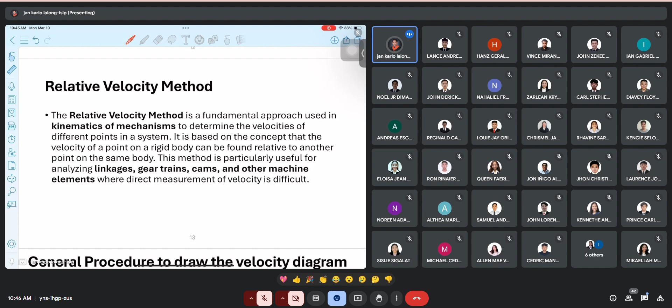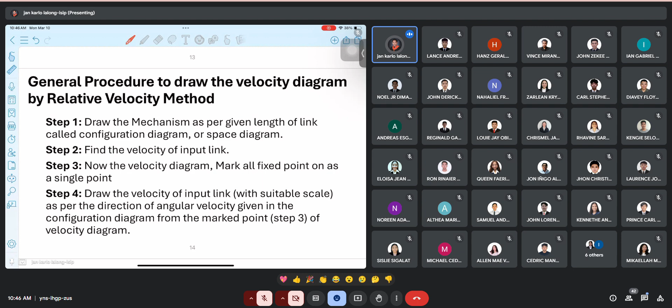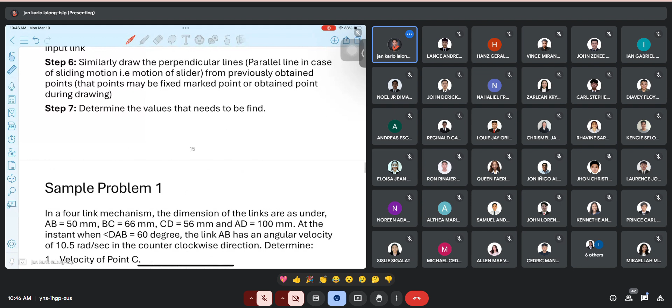Okay, so I have listed here 7 steps on how we are going to draw the velocity diagram, so that once we have the velocity diagram, we can be able to solve our velocity. So I will not discuss each one individually. Let's proceed to our sample problem so that we can easily visualize and understand the procedures on how we can solve our velocity.

Okay, so let's proceed to our sample problem number 1. We have a 4-link mechanism, a 4-bar linkage again as our first example. In a 4-link mechanism, the dimensions of the links are as under: AB is 50 mm, BC is 66 mm, CD is 56 mm, and AD is 100 mm. So at the instant,

at the instant when angle DAB is 60 degrees, the link AB has an angular velocity of 10.5 rad per second in the counterclockwise direction. So we are going to find the velocity at point C and the angular velocities of the links BC and CD. Okay, so as our first step,

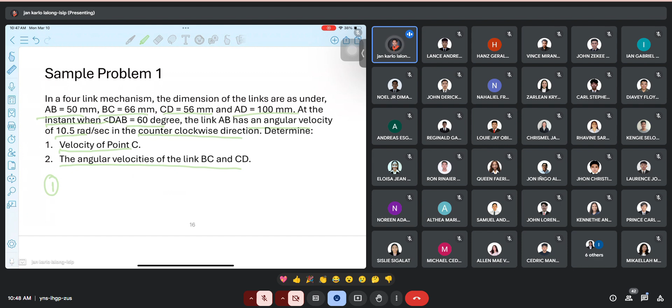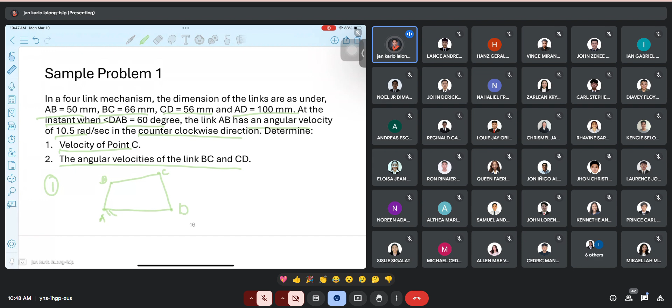we are going to illustrate or graph our given mechanism. I didn't include the illustration here, but our given is a 4-bar mechanism wherein these are points A, B, C, and D. And then we have our fixed link AD.

Okay, so the first thing we're going to do is graph our mechanism. In the past, whenever I asked you to get our graph, you would solve the transmission angle or the output angle and then get the graph from it. But I know it can also be done since all our sides, all our links, are given. So we can do it via graphical method.

Okay, so for this time, let's do it purely by graphical method in getting our sample problem. If you have your paper, compass, protractor, and ruler with you, we can get the graph. So wait, let me present my screen first.

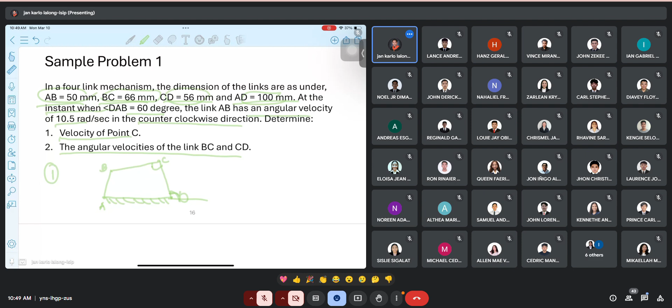Okay, so nakikita na ba yung ating AutoCAD? Yes po, opo sir. Okay, so let's proceed dun sa ating pag-graph ng ating given.

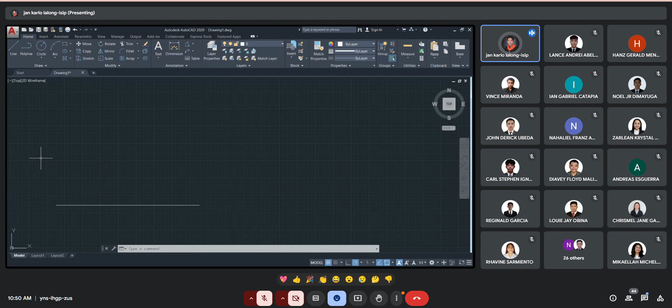Okay, so based on our given, we have our fixed link AD to be 100 mm. So we have this 100 mm. This is point A and this is point D.

And then given tayo ng AB, which is, sabi sa given natin, is 60 degrees from the horizontal. So measure tayo ng 60 degrees dito. And then AB is 50 mm.

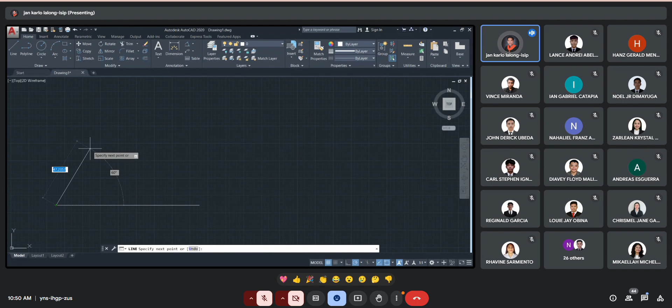Okay, so using your compass, pwede naman natin makuha yung ating BC at saka CD. So paano? You are going to draw a curve wherein ang kanyang radius, ang BC natin is 66, so this is 66. And then from this point, ang ating link CD is 56 mm, so we're going to draw a circle with a radius of 56 mm.

And then kung makikita natin, we have the intersection dito sa part na to. So you are going to draw a line here. Kung makikita natin, that is 66 mm, which is also our given naman. So tama naman, and this is 56 mm.

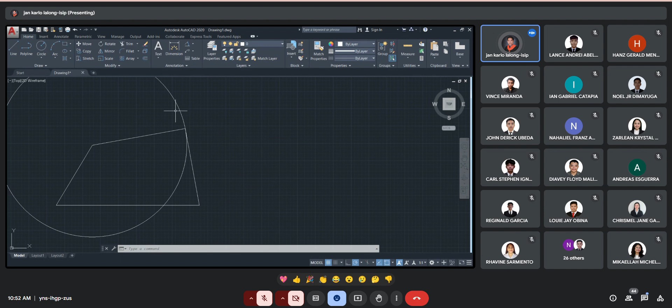Okay, and then we can now remove yung ating mga guidelines na ginawa. Okay, so everyone, do you follow? Nag-graph naman yung ating given four-link mechanism. So having the correct graph will be critical dito sa ating pagsosolve.

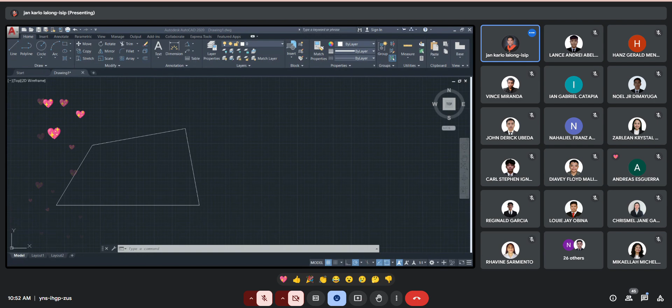Okay, so go back muna tayo dito sa aking presentation. So dito lang, wala kasi akong compass dito sa notes. Bali, protractor na lang at saka ruler ang kaya kong gamitan.

Okay, so again let's have the graph dito. So ang unang sabi dyan, 100, so that is 10. Okay, so 10, tapos naka 60 degrees daw. And then anong sukat niya? We have 50 mm dito.

Tapos, anong angle to from the horizontal? So then, kayo naman, you can use compass naman dito. Okay, wait lang, minatawag lang.

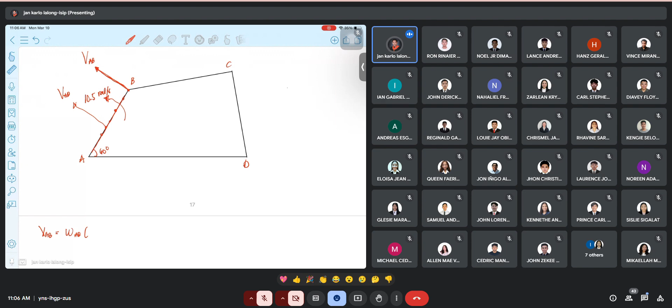Okay, so our next step, we are going to solve for our velocity at AB. So again, ang ating formula para ma-solve natin yung velocity, we have the angular velocity at AB times our radius. So at this example, yung ating radius na gagamitan is AB. Okay, so what will be the measurement, binigay na yung ating angular velocity in rad per second.

So madali na, hindi na natin siya i-convert. And then ang measurement natin ng AB is 50 mm. Again, in solving the velocity, ang gamitin natin laging unit is meter per second, so i-convert natin yung mm to meters. Okay, so what will be the value of our velocity AB? Paki-calculate ako and then paki-chat dito sa chat box.

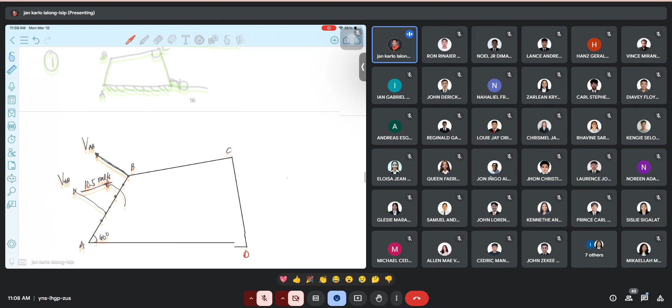Okay, so we have 0.525 meter per second. Kapag mag-solve tayo ng mga velocity problem, ang given sa atin is what is the velocity at our input link or yung ating pinaka-crank. That will be our first na kukunin. And then after that, we are going to establish yung ating gagamitin na scale.

Okay, so we are going to establish yung ating scale. So with regards to our scale, kayo naman ang bahala ng mag-scale niyan. Saan ba kayo convenient? Saka ano yung sa tingin nyo na tama with the measurement na given sa atin.

Okay, so dito, I will just have the scale. For example, our 0.525 meter per second is equals to 50 mm. So now, kapag ito yung ginamit kong scale, kukunin natin kung anong scale niya kapag meter per seconds to length. So if I have 1 meter per seconds, what will be the value of length?

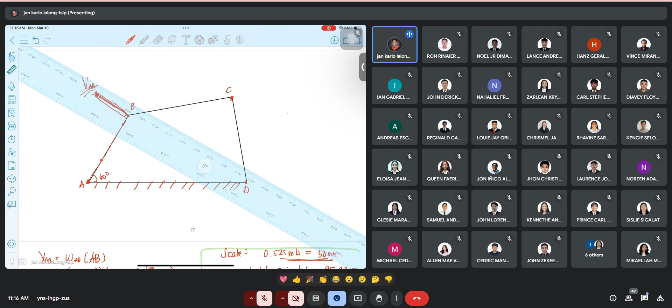Okay, now we have our point C naman. Kung papansin nyo dito sa ating graph, we have point C na connected sa ating point B. And then, our point D which is connected dito sa ating point C din. Again, we are going to get yung perpendicular line dito. And then kukunin natin yung intersection sa ating graph. So let's connect first our point B going to our point C. So somewhere here, pero hindi pa natin sure kung saan. Kukunin natin yung distance, yung intersection nung line na ito at nung line na ito, and that point will be our point C. So paano ba yon?

Again, we are going to use our rulers. And then i-measure natin yung kanyang perpendicular line dito. So itatama ulit natin yung ruler natin dito so that it will be perpendicular. Ayan. So kung tama na yung ruler natin, let's go back here and then let's draw a line, the same line yung ating ito-drawing. Okay, so this first, this is a guideline muna.

And then, balik tayo sa ating pinaka-graph na ginawa. I-measure naman natin yung ating perpendicular line sa link CD. So itatapat ulit natin siya dito. So 10 degrees daw, sabi dito sa ruler ko. And then we are going to draw a line from point D, that is point D to our point C. And then this will be our intersection. So this line will be our point C.

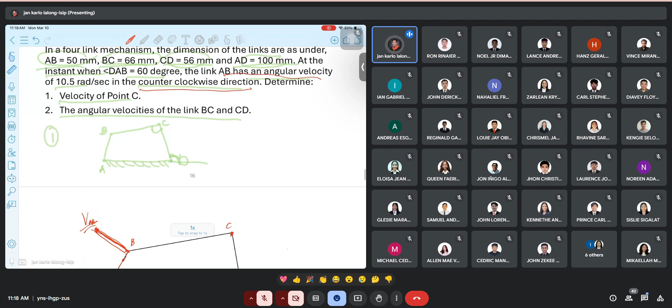Okay, so let's go back sa ating unknowns. So sabi dito, we're going to find the velocity at point C. So unahin natin yon. We have the velocity at point C.

So going back sa ating graph, this is our point C, and then it should be perpendicular dito, di ba? But then, our velocity at point C is equals to our velocity at the link CD, kasi any point dito sa ating link CD is equals.

Kaya yung ating point C ay equal sa velocity natin in any point dito sa ating VCD. So let's have our velocity at C is equals to VCD, velocity at CD natin. At para ma-measure natin yon, we're going to sukatin natin itong ating velocity CD by graphical method.

So using our ruler dito, tapat muna natin. Okay, so yung length ng ating VCD is around 39 mm, 3.9 centimeter. So that is 39 mm.

Okay, so ngayon, we're going back sa ating scale. So sabi natin, 1 mm is 0.0105 meter per second. So we are going to convert yung ating mm to meter per second. So we have 0.0105 meter per second per 1 millimeter. Okay, cancel ang millimeter. So our velocity at point C will be, so paki-compute, what will be our velocity at point C?

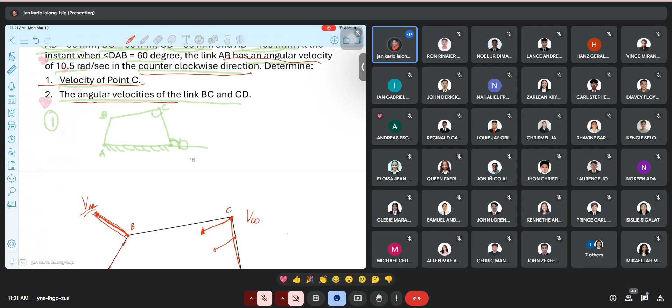Okay, so let's proceed sa next. We have our velocity and angular velocities of the link BC and CD. We have BC and CD.

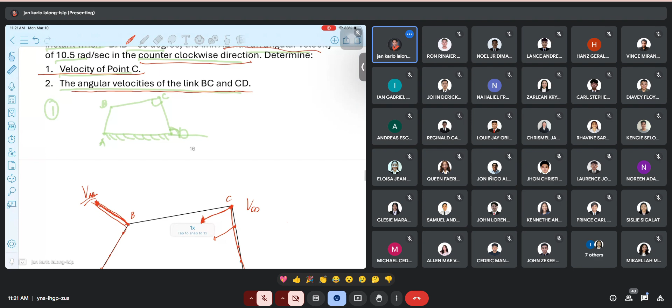Okay, so going back, we have our velocity to be equals to our angular velocity times the radius. So our angular velocity will be solved using our velocity over our radius. So let's have our angular velocity at BC, it will be equal to the velocity of BC over yung R natin, radius. So in the case of BC, that will be the length of our link BC.

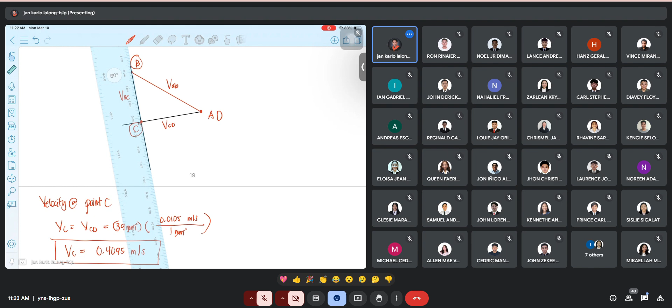Okay, so now we are going to measure yung ating velocity at BC. So kunin ulit natin yung inyong ruler and then sukatin nyo kung ano yung length natin dito ng point BC. Okay, so base sa ruler ko dito, that is at... asan na yun? 3.4. Okay, so depends naman kung ano yung makukuha nyo dyan. Okay, so in my illustration, in my graph, nakuha ko is 3.4 centimeters, so that is 34 mm.

Again, our scale na establish natin, 0.0105 meter per second is 1 mm. Okay, and then what is the length of our BC? What is the length of our link BC? So our BC is 66 mm. So we have here 66 mm. And then sabi ko nga dito may meters tayo, so dapat naka-meter siya. So 1 meter is 1,000 mm.

Okay, so with that, what will be the value of our angular velocity BC? Okay, so we have 5.409 radians per second. Okay, so that is already our angular velocity at BC.

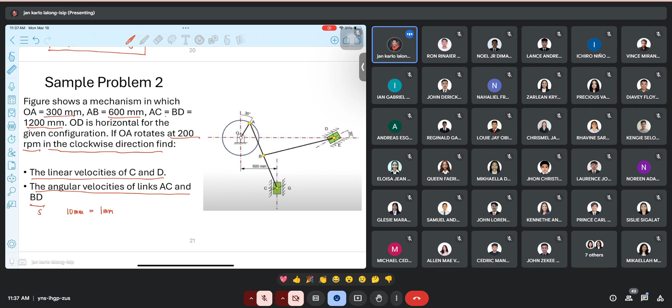So this is our scale value. So 300 becomes 30, this becomes 60, this becomes 120. Okay, so let's have our graph here.

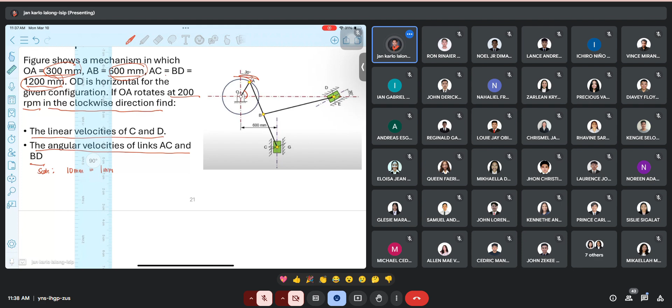Okay, let's use a ruler. First, we have our fixed point at O, and that is at 30 degrees with the vertical. So with the horizontal, that is 60 degrees. Let's make it 60 degrees.

So let's start drawing our mechanism. At 30 degrees with the vertical, that is 300 mm, so that is 3 centimeters or 30 millimeters on our scale. So at this point, this is 3.

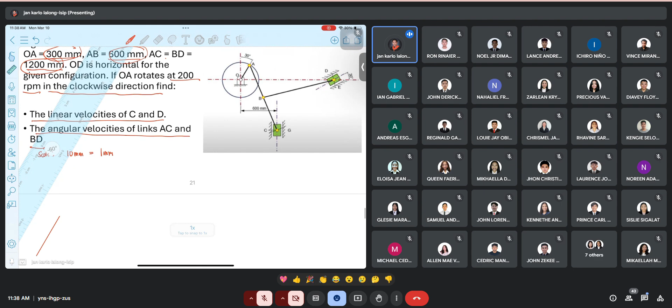Now the distance from point O to our point C is 600 mm. So let's first make a horizontal line here as a guideline for our reference.

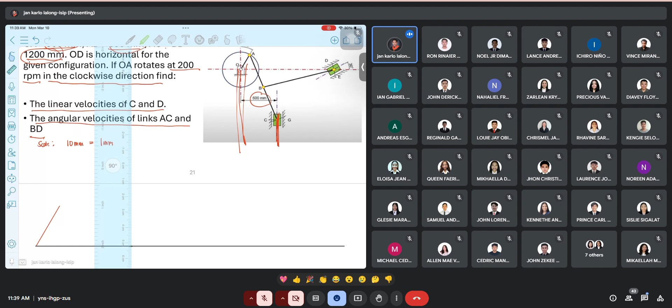And then at 600 mm, that is 6 centimeters or 60 mm. So let's highlight that, and then draw our line here. Let's put a line first.

And then our AC is 1200 mm, so that is 120 millimeters. From that point, we measure 12 cm, wherein they will intersect at our vertical line here. So 12 is the right measurement, there, 12.

Okay, so we are going to draw a line here. So now we can erase the guideline we made.

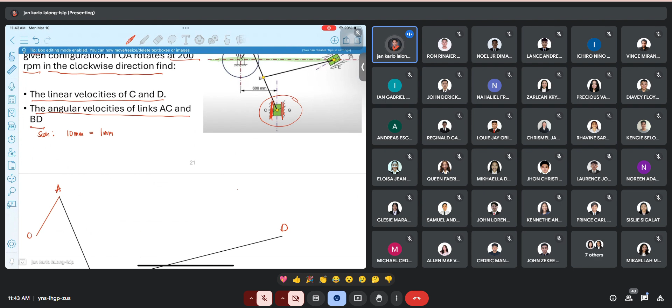Okay, so this is our point O, and this is A, B, C, and D. But if we notice, we also have point G, which is our ground for this slider. And we have our point E here.

Now we are going to have our velocity diagram. Okay, so how are we going to start solving our velocity diagram? First, let's have our scale.

So before we have our scale, let's solve for our velocity at the input. At this point, we get the velocity of AO, the velocity at link AO. Our velocity at AO will be equal to the angular velocity at AO times the radius, and the radius we use is also AO. So first we solve for our angular velocity at AO.

So again, that is 2 pi n. It will become 2 pi times the given speed in the problem, which is 200 RPM, that is 200 revolutions per minute. And since meters per second is our unit, we convert it into seconds, so 1 minute is 60 seconds.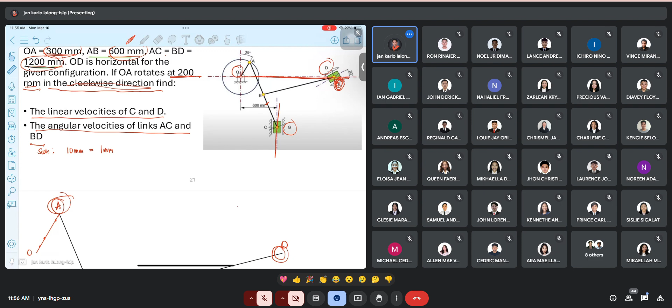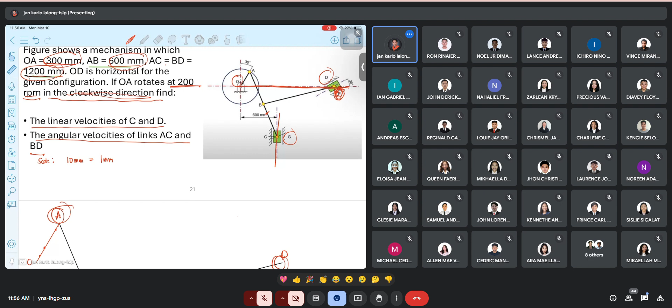Okay, wait, let me check. So, it's not from point O, we measure from point E.

Let's start with point B. We are going to get the perpendicular line at our link BD. Let's measure first. We get the perpendicular line from point B, starting from our point B here.

And then our point D should be positioned at 30 degrees from the horizontal. Right, 30 degrees from the horizontal. So this angle here is 30 degrees.

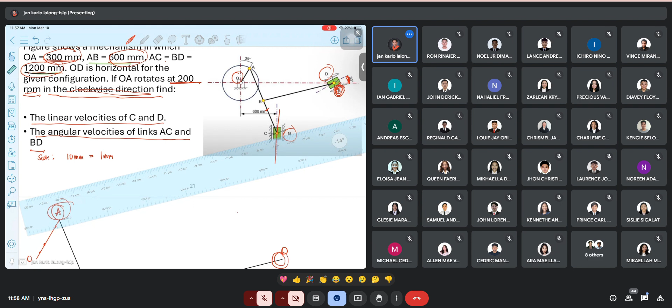Okay, so it's just this. This line is at 15 degrees. We'll align it here with our link BD. And then we're going to draw a line here from point E to this point. So this intersection will be our point D.

Okay, so we have completed the points of our mechanism. Now how are we going to solve for our unknowns? The first thing we need to find is our linear velocity at C and D. So we have the velocity at C and D.

To be able to solve for our velocity at point C, that is just the same as the velocity of AC. We are going to measure point AC. For velocity at point C, we measure from the fixed point at our point O. So we are going to have the measurement of this OC line.

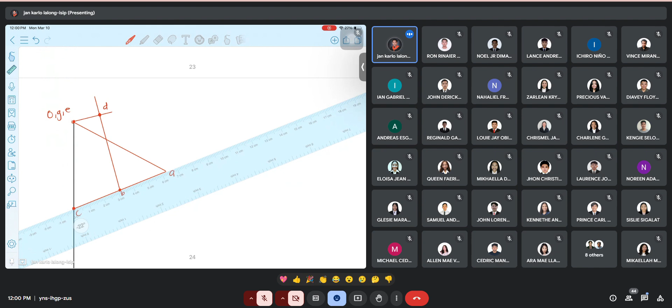So, that's right, let's go here. We are going to measure the length up to AC, point C. That is the length of this OC line. Measuring that, this is 5.6, sorry, let me check. Okay, so this will be 51 mm.

Let's go back to our scale, wherein 1 mm is 0.105 meter per second. So 0.105 meter per second per 1 mm. What will be the value of our velocity at point C? We have 5.355 meter per second.

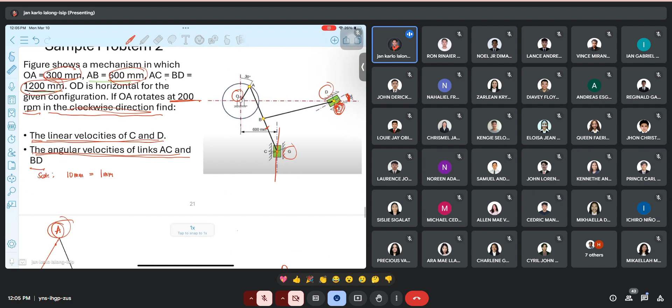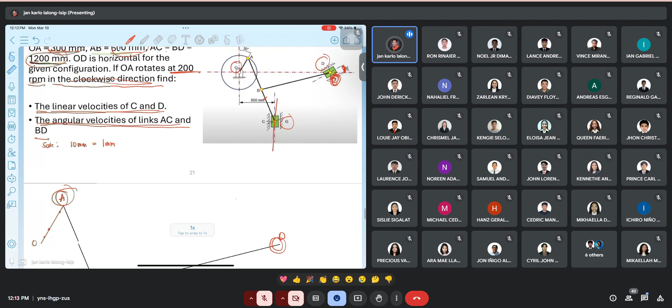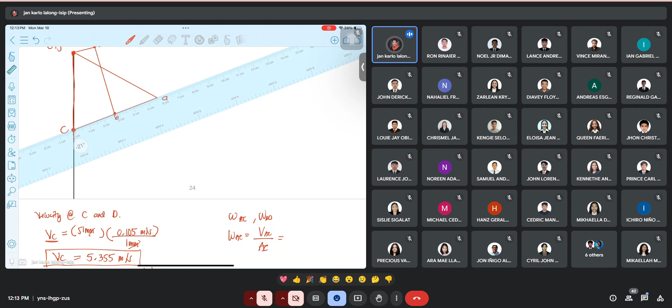Next we have our angular velocity at AC and BD. Our angular velocity at AC is equal to our velocity at AC over AC. Let's measure again our AC. So we have 5.6, that's 56 mm, and again we have our conversion of 0.105 meter per second per 1 mm.

And the length of our AC is 1,200 mm, and then convert it to meters using 1,000 mm, so the mm cancels out to meter. So what will be the value of our angular velocity AC?

So that's 4.9. Is that exact? 4.9 rad per second. Okay, so 4.9 rad per second.

Okay, let's go to our angular velocity at BD. Angular velocity at BD is equal to our velocity at BD over the length of BD. Again for the velocity, let's get the measurement of our BD. Our BD here is at 4.5, this is in cm, so that's 45.